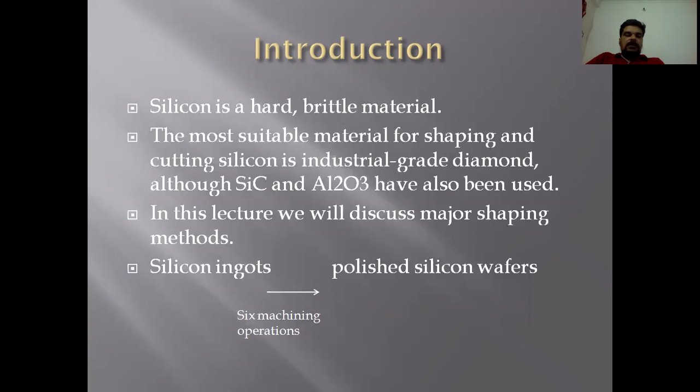So here in the diagram, you can see that these are the silicon ingots that are formed. From these silicon ingots, we have to get the polished silicon wafers. So the very first shaping operation includes basically the removal of seed and tang ends from the ingots.

So basically, the silicon ingot looks like this. These ends you can see here, the tang end and the seed end, because you have seen in the CZ process that we used a seed crystal on which the silicon was grown. So that is the seed end and this is the tang end. So first of all, these two ends are removed.

Now in this process, there are certain resistivity tests also. The portions of ingots that fail this test are also cut off. These rejected ingot pieces can be used as metallurgical grade silicon, and from that we can obtain electronic grade silicon by repeating the same processes that we discussed in previous lectures.

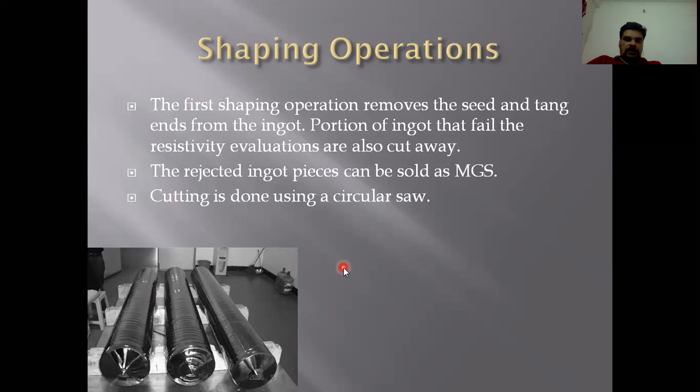So cutting is done using a circular saw. We use a circular saw in order to cut the seed and tang ends. Now after this step, you can see that there are certain irregularities on the surface of the ingot. In order to remove these irregularities, we use the surface grinding method. This is the next step in silicon shaping.

It basically defines the diameter of the wafer we want. So this is the schematic diagram of a diameter grinding tool. Here you can see the ingot. It is rotating in an anti-clockwise direction, and along with that, a diamond cup wheel rotates in a clockwise direction.

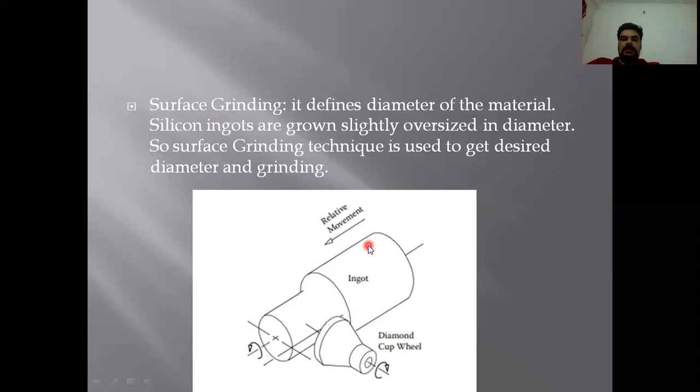Now, as per the required diameter of the wafer that we want, this diamond cup wheel tool can move here, as per the required diameter of the ingot. So when this moves clockwise and this moves anti-clockwise, we get the grinding of the surface as well as the desired diameter.

After diameter grinding, there are certain flats that are assigned to the wafers. The largest flat is called the primary flat, and the second one is called the secondary flat. These flats basically tell two things: one is the doping type of the wafer, and another is the orientation of the wafer, whether it is 100 or 111.

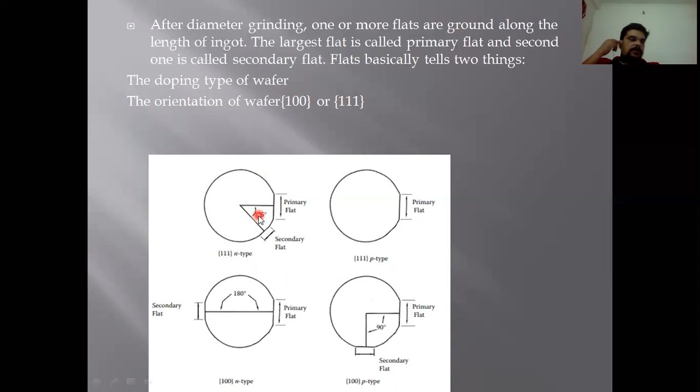As you can see, for a 111 N type silicon wafer, there is the primary flat and the secondary flat, and the angle between primary and secondary flat should be 45 degrees. So by seeing this type of wafer, we can tell that this is N type silicon with orientation 111. Now for 111 P type, there is only the primary flat. But if the angle between primary and secondary flat is 180 degrees, then it is a 100 orientation type.

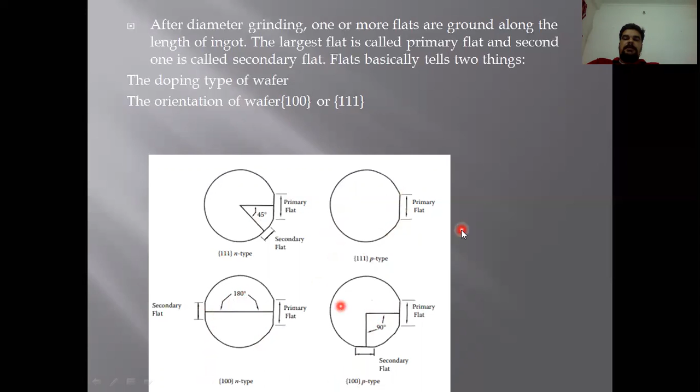And if the angle between primary and secondary flat is 90 degrees, then it is a 100 type condition. Now, if the diameters of the wafers are larger than 8 inches, these do not have flats. If the diameter of wafers is less than 8 inches, 6 inches or 4 inches, then we use this kind of flats. If the diameter is more than that, that is the 8 inches range, then we do not use these flats.

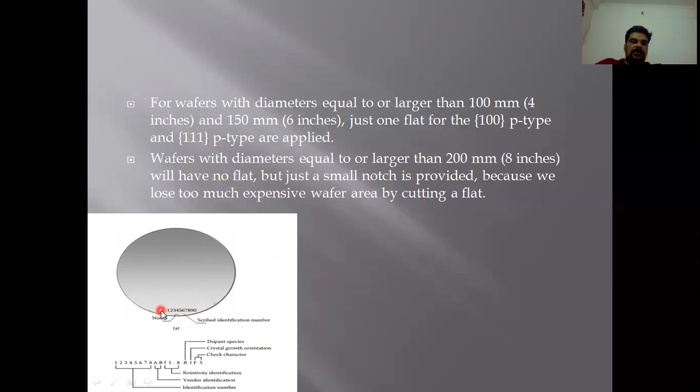Because if we use these flats, then we would certainly lose a considerable amount of material from the wafer. So for this purpose, we use notches. These are the notches that we use, and here the identification number is printed, and according to its nomenclature, we can identify various things. By doing this, a very small amount of silicon is removed. So this type of identification is used if the diameter of the wafer is more than or equal to 8 inches.

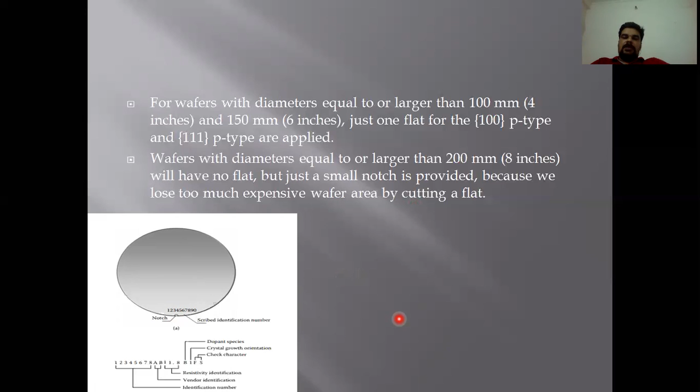Next step is ingot slicing. Silicon is obviously very hard, so special tools are needed to slice the ingot into smaller wafers. Slicing is very important. It determines basically four parameters: surface orientation, wafer thickness, taper, and bow. As you would know, the mechanical properties of silicon differ with the orientation.

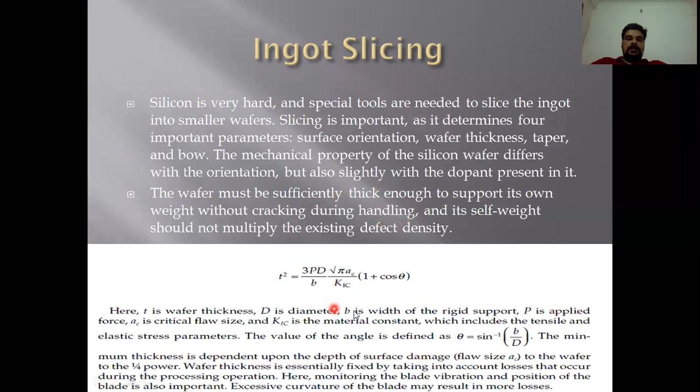The wafer must be sufficiently thick to support its own weight without cracking during handling. So what should be the minimum thickness of the wafer? This is the formula by which we can find the minimum thickness of the wafer.

Now there are two slicing methods by which we can slice silicon ingots. The first one is the ID saw and the second one is the wire saw. ID slicing is the common mode of slicing ingots. So here, what is done? The saw blade is a thin sheet of stainless steel, approximately 325 micrometers thick, in the form of a ring. Rotation speed is around 2000 rpm.

Here the ingot is stationary and the blade is moved relative to the stationary ingot. The operation is continued until the step is complete. ID saws basically cut one wafer at a time, and this saw is water cooled to avoid excess temperature generation. This is the simplest process of slicing silicon ingots.

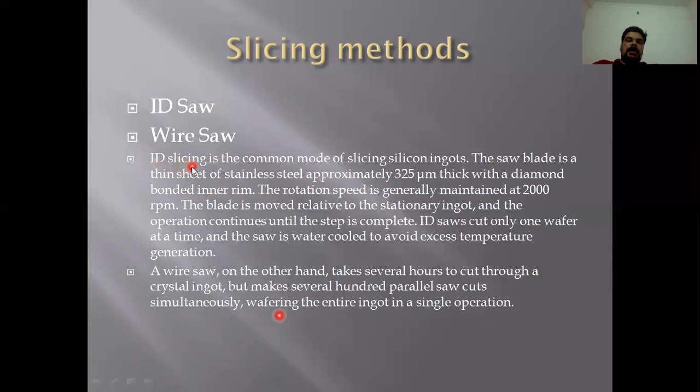Now, the second method is a wire saw. A wire saw takes several hours to cut through a silicon ingot, but many cuts are imparted on the silicon ingot simultaneously. In this process, the entire silicon ingot is wafered in a single operation, while in the ID saw method, we were getting a single wafer at a time.

This is a very simple diagram of a wire saw. Here is the movement of the ingot. These are the wires, and these are the rollers that move in clockwise as well as anti-clockwise directions. As these move downward, the wafers are cut accordingly. As many wires as there are, that many wafers we get. This is the industrial implementation of wire saw machines, which are interesting.

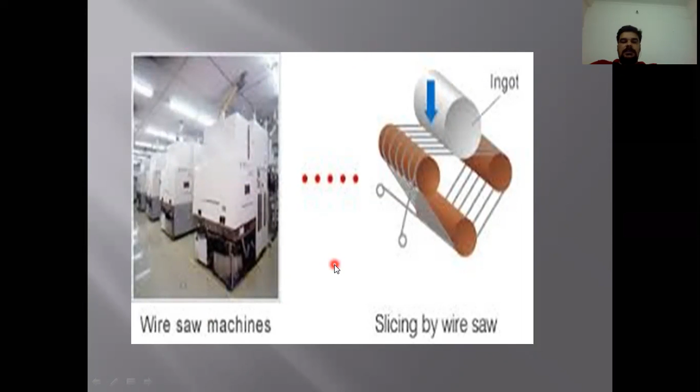Now, after slicing, there is another method called mechanical lapping of wafer slices. The slices we obtain after either of the two methods, ID saw or wire saw, have a lot of unevenness on the surface. Mechanical polishing is necessary to remove these surface irregularities. For doing that, wafers are placed on a lapping pad, and fine Al2O3 aluminum oxide powder mixed in glycerin is applied under constant pressure.

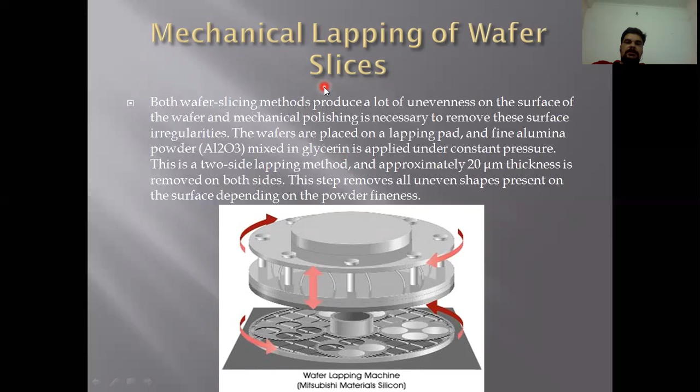Next is edge profiling of slices. After the mechanical lapping process, wafers are separated and are taken for edge contouring.

Now up to this process, mechanical lapping of wafer, the wafers formed have basically sharp edges. So in order to convert the sharp edges to a round shape, we use this edge profiling method. In this edge profiling method, you can see that there is a diamond cutting tool here. This stand rotates basically like this, and this cutting tool also rotates. So we get the round shape by this method.

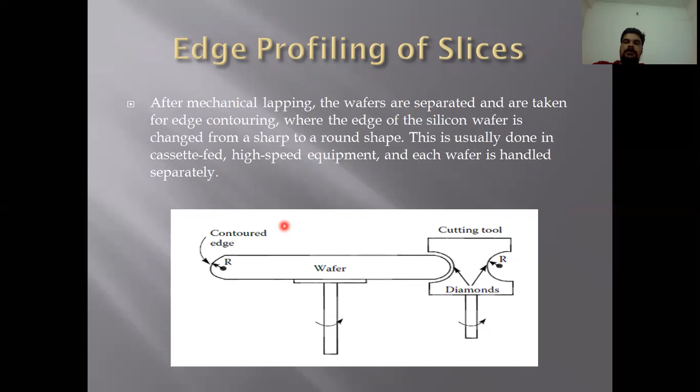After that, chemical etching and mechanical damage removal is done. The previously described shaping operations leave the wafer surface and edges damaged and contaminated with chemicals and fine particles. All the previous methods were mechanical operations performed on the silicon ingots to get silicon wafers, and by these mechanical processes several damages and contamination can take place on the surface, and certain chemicals can contaminate the surface of the wafer.

These mechanical damages are roughly around 10 micrometers deep from the surface. So certain chemical etching processes are done so that these can be removed. These mechanical damages go to about 10 micrometers deep from the surface of the wafer, but for the sake of safety, 20 micrometers thickness is removed from the surfaces by the chemical etching process.

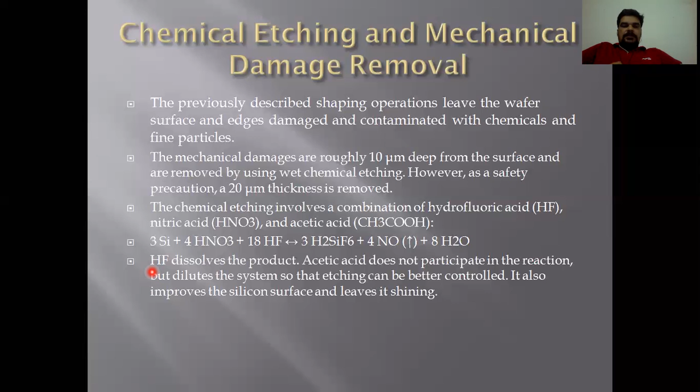Now the chemical etching involves a combination of hydrofluoric acid, nitric acid, and acetic acid. This is the reaction that takes place here. So what is the role of the hydrofluoric acid? It basically dissolves the product. Acetic acid does nothing in the reaction but only dilutes the system so that the etching can be better. It also improves the silicon surface and leaves it shiny.

Now, this is the chemimechanical polishing for planar wafers. This is basically a final step in silicon shaping. Depending upon the application, polishing is carried out on one or both sides. For VLSI and ULSI applications, polishing of one side is sufficient. But for MEMS applications, that is micro electromechanical system applications, polishing of both sides is required.

Now, what is the purpose of this polishing? The purpose of polishing is to provide a perfect and smooth surface on which devices can be formed. So here we are using a polishing pad. It rotates continuously, and we use a slurry that is deposited on the polishing pad. As the polishing pad is rotating, the wafer is attached to this polishing pad, and a certain chemical reaction takes place, so that polishing is done.

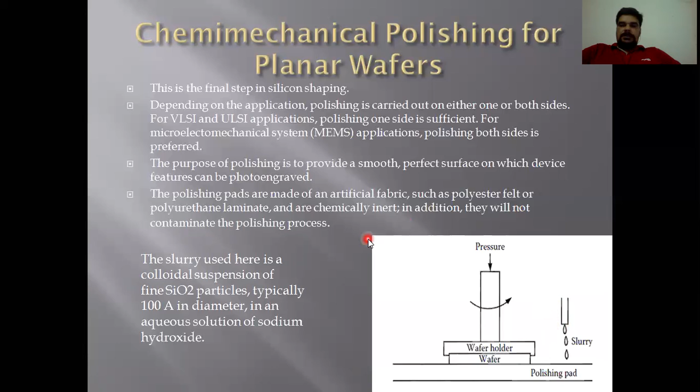These polishing pads are made of artificial fabrics such as polyester felt, or you can use polyurethane laminate, and they will not contaminate the polishing process. The slurry used is a colloidal suspension of silicon dioxide particles, typically 100 angstroms in diameter, in an aqueous solution of sodium hydroxide. So by this we can do chemimechanical polishing.

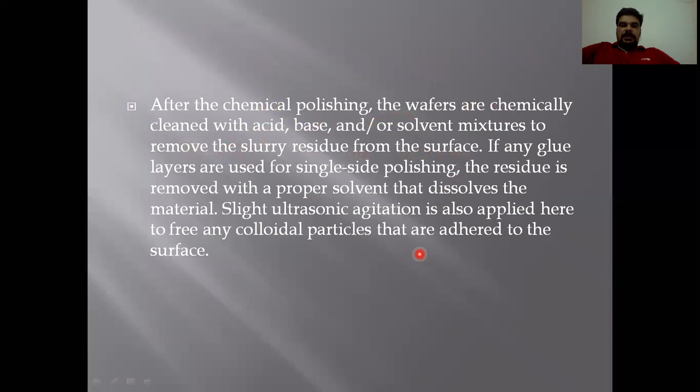Now after chemical polishing, wafers are chemically cleaned with acid-base or solvent mixtures to remove residue. If any glue layers are used for single side polishing, the residue is removed with a proper solvent, dissolving the glue.

Now there is the final cleaning and inspection process. Final cleaning of the silicon wafer is carried out in different stages, such as the standard Piranha cleaning based on a mixture of sulfuric acid and hydrogen peroxide, and RCA cleaning steps. These were the final cleaning steps before the packaging of your silicon wafer. So these are the steps that were used for silicon shaping. This is all about this lecture.